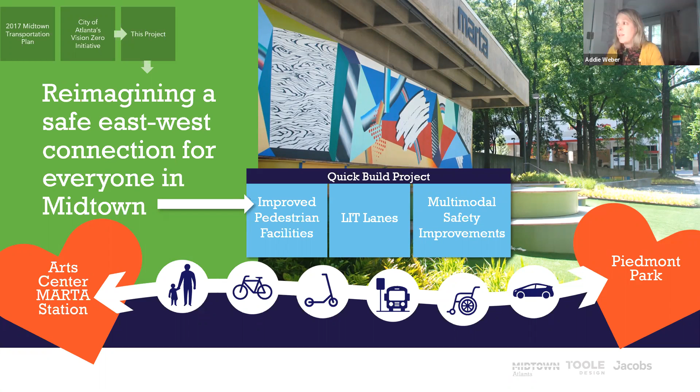So again, quickly going to go over the why and the where. All of this existing condition analysis can be found online. So if you want to do the deep dive, please go there. And we spent time in the previous virtual open house going over that. So as Julie mentioned, this is really focused along the corridor, but with an emphasis on the 15th and Peachtree Circle interchange. So we're looking at how do we provide that safe east-west connection in the north part of Midtown. That's not just for bike users, but also for pedestrian users as well. It plays an important connection in the district.

So most of you should know what lit lanes are, light individual transport lanes. We went over this in previous conversations, but it's really bikes and other modes that we really want to highlight. So it's the short trips, the last mile connections, human powered or electric vehicle uses as well. It's a great tool to use. Just think of it as expanded, upgraded bike facilities that we have through here.

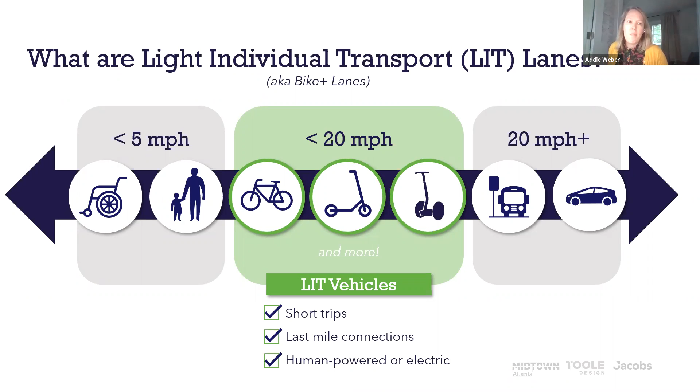So why are we doing this project? Well, there's several big initiatives that are happening citywide and with Midtown Alliance. So you might have heard recently the mayor has passed 25 miles per hour on local roads. This is in direct response to some of the feedback that we're getting and some of the data that we see within the City of Atlanta.

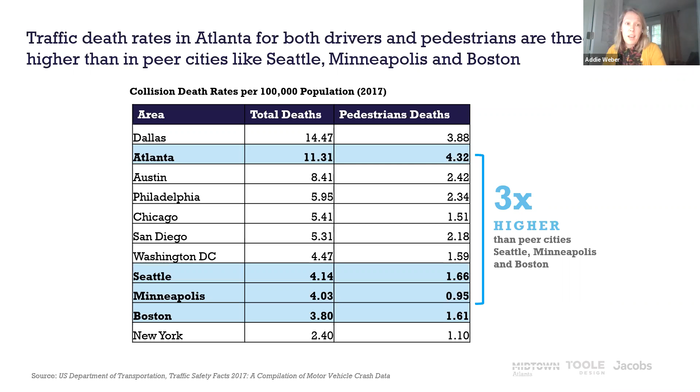Traffic death rates in Atlanta are high, especially when you look at comparable cities. That's why the One Atlanta Strategic Transportation Plan that was adopted really emphasized this Vision Zero approach, which looks at traffic safety as a growing health problem. So building on that Vision Zero initiative, the city is really undertaking a way to rebalance our streets and make them safe, not just for cars, but for bikes and peds as well.

So that's where this project comes into effort. This is from their previous transportation master plan, so it's not just pulled out of the sky. This was actually in the work program from the transportation master plan that was adopted. And as you can see, hopefully you can see my cursor, you have the magenta dashed lines, which are planned separated bike facilities. You have the blue line, which is on-street bike facilities to date. You have this planned shared use path. So we're really looking at how do we provide a safe connection from Piedmont Park all the way over to the Arts Center MARTA station.

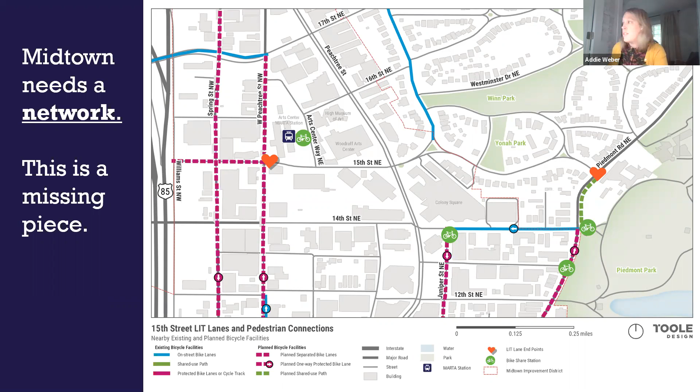Again, these are a lot of the projects that are happening. Midtown's got a lot going on. It's really great to see the thought and care taken at looking at how do we make these streets not just for cars, but for people. That doesn't mean eliminating cars, but it means looking at vehicles, bikes, peds, looking at people, where they're going, and where the potential conflict points are for the users as well.

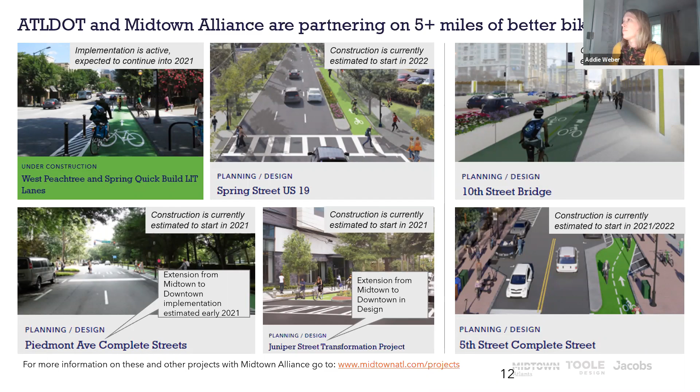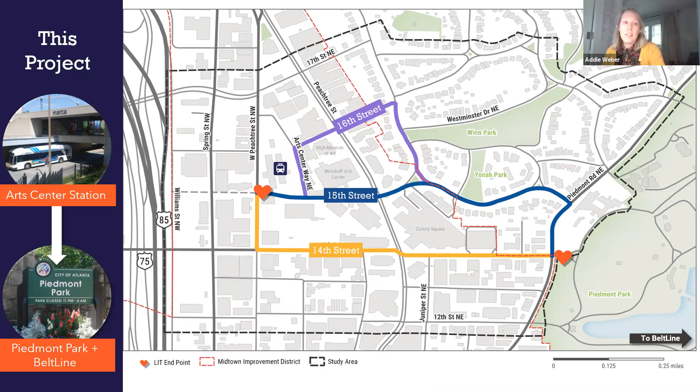So this project took a look at 3 corridors. 15th Street was the name of the project, but we wanted to make sure we took a look at 14th Street and 16th Street. From our analysis, 15th Street was really the preferred alternative for a variety of reasons. If you want a deep dive on the analysis that we did, you can go to the website. We did notice that 15th Street is that direct connection. We've heard from a lot of folks that they want that direct connection from Piedmont to the MARTA station and places in between. There's also obviously a wide right-of-way.

So part of our effort is really looking at how do we do this quickly within the right-of-way that we have. We don't want to buy new right-of-way; it delays the project. So where can we put bike infrastructure, and how do we improve safety? The Peachtree Circle and 15th Street intersection had a significant number of crashes at the northern end of the intersection, so right here. So how can we use this project to help improve safety for all users?

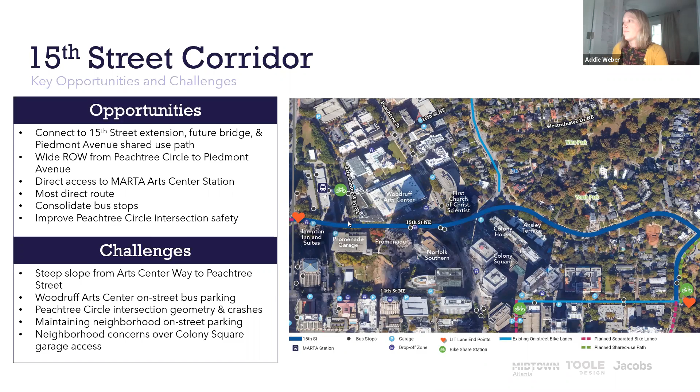So again, you can go find the existing conditions report. It's on the Midtown website. It looks at the community engagement summary. We did an origins and destination analysis of all 3 corridors that we looked at, transit operations, corridor overviews, a multimodal analysis, and recommended design considerations. We did spend a lot of time. I believe we did at least 2 rounds with some major stakeholders along the corridor, and then a deeper dive with some residents after our virtual workshop.

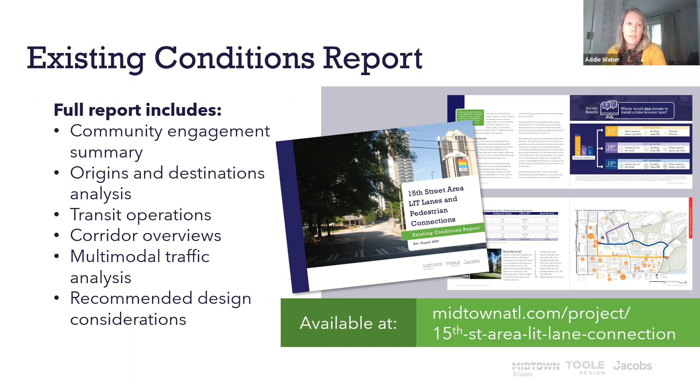So where are we in the process? Right now we're still in the community engagement process. We are in our 2nd virtual open house, but from here we will move into schematic design. From there, we will be able to let Midtown Alliance know how much funding is actually needed for this project and who the key partners are. So the implementation of this project is still to be determined, but that is something we're hoping to flesh out as we move into schematic design.

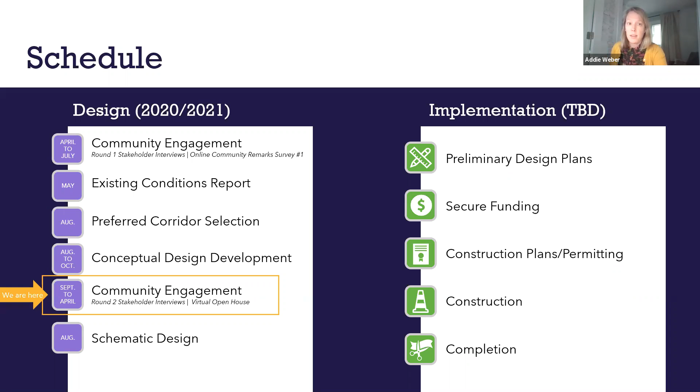So now I'm going to switch into the revised concept. Again, most of you have seen this before, so I'm going to move somewhat quickly through the facility types and the modes and really pause on the 15th Street Peachtree Circle intersection.

These are the 3 facility types that we'll be seeing along the corridor. So we have the protected bike lanes, which we know are the preferred type of facility for all users and all abilities. It really gives that safety, especially folks and families coming from Piedmont Park and going to the Woodruff Arts Center. Having those facilities are there.

Bike lanes buffered from parking. This is what is happening currently today on Peachtree Circle in Ansley Park, north of 15th Street. So Peachtree Circle already has a similar condition. And then shared lanes. While shared lanes aren't our preferred alternative, there are places where there is a pinch point, and recognizing the fact that we want to stay within the right of way, there are a couple areas where we highlight the shared lanes.

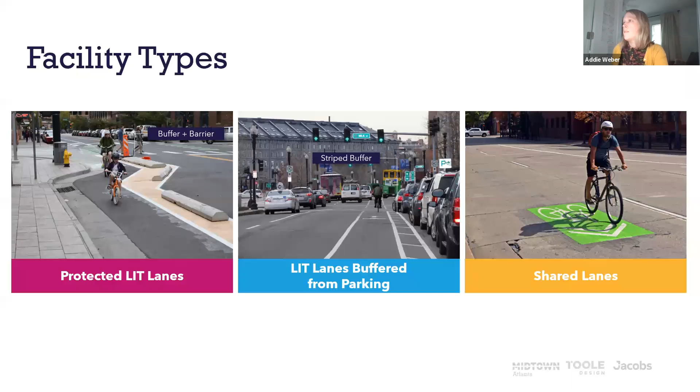So I'm going to start at West Peachtree and move from West Peachtree east towards Piedmont. Most of you know that there's going to be a 15th Street extension, and part of that extension is they will have bike lanes in either direction. Those will be sidewalk level facilities. So we wanted to build on that existing effort that is moving through the process and continue to provide bike facilities that are buffered from the vehicle travel lane.

So what you'll find as I move through this presentation, the orange dot is movements going eastbound, and the blue dot is movements going westbound. We will have conflict markings along the corridor to let folks know where there's potential conflict points with bikes and peds. So again, one dedicated eastbound lane for vehicles, one dedicated right turn lane, and one dedicated through lane westbound to line up with the 15th Street extension project.

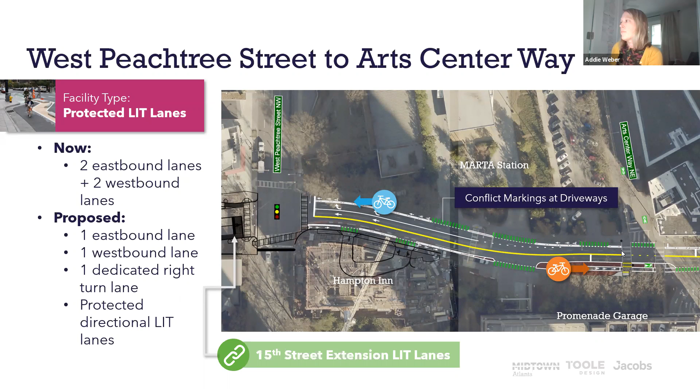Again, this is just a closer look at that 15th Street extension that will be coming online. You will have a dedicated left turn lane to go north on West Peachtree and one lane in each direction, along with sidewalk level bike lanes.

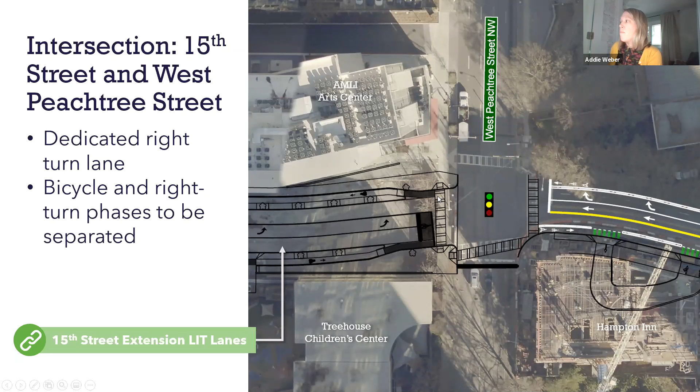As we move closer to Arts Center Way, we know, as we watched when we did our corridor walk, and those of us who hang around the MARTA station can see the number of pedestrians that move through the space. Part of our design concept is to really give places for people to be. So where should bikes be, where should pedestrians be, and where should cars be? Giving that legibility so that folks know where they're supposed to be, regardless of the mode.

We are suggesting an RRFB, so that's a rapid flashing beacon, at the intersection of Arts Center Way and 15th Street. So it retains the crosswalks. It adds a 2-stage bike staging for those folks that want to go to Arts Center Way. We did look at Arts Center and 16th as an alternative. Some of the feedback we got from the community and stakeholders was there's a lot happening on that intersection and closing it down. However, we know that that is still a route, and so we wanted to make sure that route was still a viable alternative.

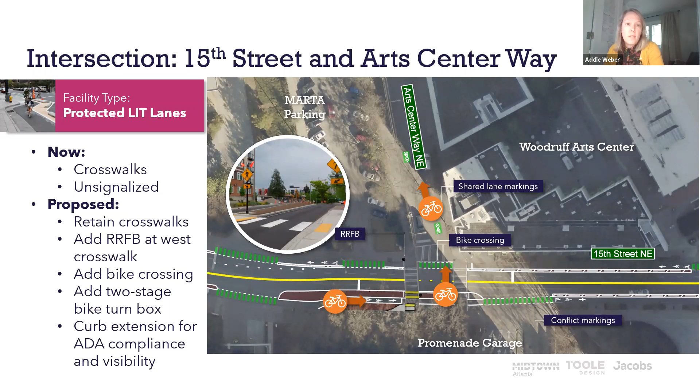Moving from Arts Center Way east towards Peachtree Street, again, we're continuing with the buffered bike lane protection, both eastbound and westbound. Through here, we wanted to preserve and consolidate some of the loading bay and drop-off zones that are there today on the south side of 15th Street. We also have worked with MARTA and had discussions with them on their needs for drop-off at the MARTA station and the MARTA bus stop.

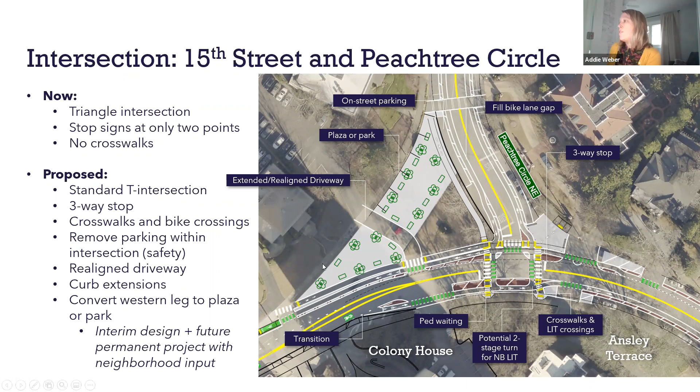So we went back to the drawing boards and looked at how could we do a lighter touch and keep a lot of what is there today. So this is the lighter touch that we have developed. This, a couple things, it retains all existing stop signs. So currently you have 3 stop signs today, and that is our recommendation moving forward.

What was interesting feedback was, as we were talking to some of the stakeholders, some of them didn't realize that there were 3 stop signs around the triangle. And I think that just goes to the wideness of the road, and that folks are looking in every different direction to move through the space.

So some of the key elements that we put in place here was to have Peachtree Circle tie directly into 15th Street. We understand that this is the major movement based on our traffic analysis. These legs of 15th Street, so 15th Street is here as it comes to existing 15th Street, teeing that up a little bit. That way that intersection has direct view of where folks are coming from, and also providing, again, that legibility of where users should be in the corridor.

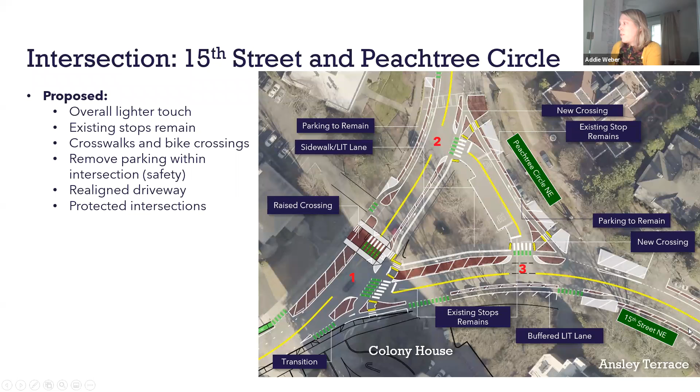So what does this look like? So the intersection, the raised crossing, this is an example of that. You can also see locally down by Krog Street Market, there is a bike ped crossing that the Beltline has to date. So that is a great way to not only provide visibility for bikes and peds as they're crossing the road, but it's also a traffic calming measure as well.

And again, the lighter touch around the triangle where you're going to have bikes and peds moving through the space would be something along these lines, where you have some sort of protection here and a more robust protection at intersections to make sure that bikes and peds are protected from vehicle turns as we move through here. Parking would still be retained along Peachtree Circle and along Peachtree Circle here, but it would need to be removed where there were some spaces along here. Again, the parking along the island, we heard from residents that that was not a priority, but putting places for people to walk and cross was beneficial.

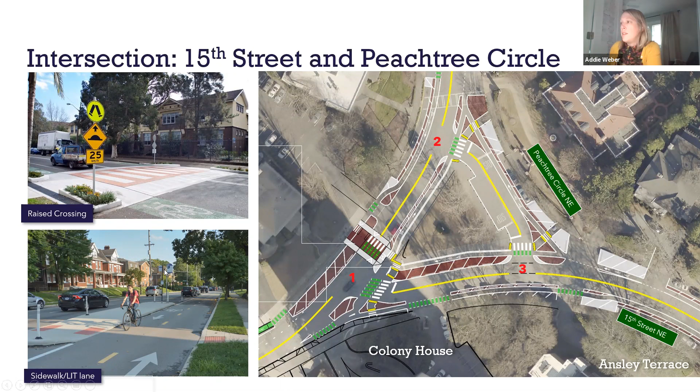So I'm going to leave Peachtree Circle and continue eastbound along the corridor. And not much is changing from what is currently on Peachtree Circle north of 15th Street. So it's just formalizing that connection. So lit lanes with a buffer and parking to remain along the corridor. We are looking at also tightening up the vehicle travel lanes to help slow speed through the community. And you can see how bikes move through here.

Once we get to Lafayette Street, again, we heard from folks about the lighter touch through there. So it's really just formalizing the connections of where bikes and peds should be. Again, they're kind of using the street along with vehicles today because there's no formalized crossings that are well established in the breadth of the Ansley Park Road. So really identifying where bikes and peds should be as they move through this space.

And as you approach, we have the Piedmont Shared Use Path, which will be coming up along the east side of the road and then crossing. So we are going to provide a two-stage crossing further when you get to Piedmont to cross over and access that shared use path. We are retaining the parking for the community over here, and then there were 2 parking spaces that we dedicated towards having the protected facility for those folks wanting to access Piedmont Park.

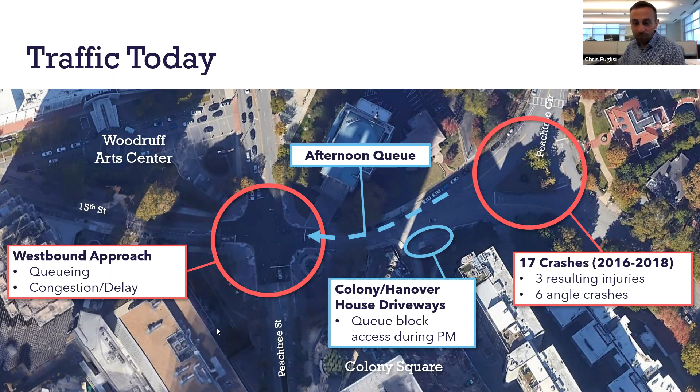And then we also noticed a concentration of crashes at the Peachtree Circle intersection. There were 17 crashes in the 3-year period that we looked at, which is fairly high for this level of traffic volume and sort of residential character street. 3 of those crashes resulted in injuries, which is concerning, and 6 of them were angle crashes. Angle crashes are when turning vehicles collide with other vehicles. So we took that into consideration when helping craft the concept. If you could advance the next slide.

So by maintaining the cross section at Peachtree Street, we kept the same lane configuration. We kept the left turn bays. And then one thing that we are adding is a westbound left turn arrow at Peachtree Street to help with that queuing on the westbound approach. So that left turn phase through our analysis actually reduced queuing by about 1/3, which is pretty significant. So that should help navigating this area when entering and exiting the Colony House driveway, but also just helping reduce congestion in Ansley Park.

We also modified the geometry of the Peachtree Circle intersection by really teeing up those intersections at 90-degree angles. Helps make for a safer area to cross. Also with the narrower lanes and speed calming elements, we anticipate that this design should experience fewer crashes and be much easier to navigate around this area.

It also provides an opportunity to have protected pedestrian and bicycle crossings. We also didn't introduce any new stop signs to this area, so traffic should flow through this area as it does today, just a lot safer.

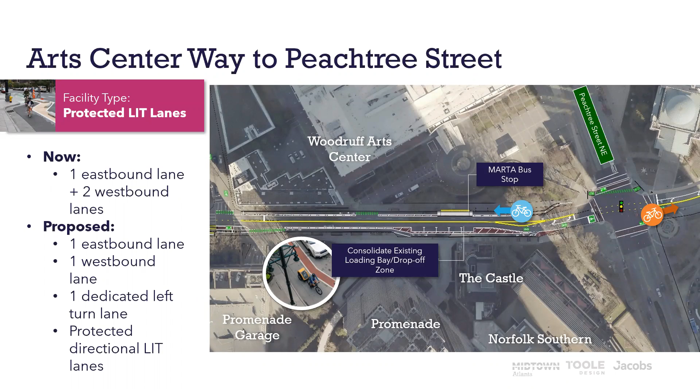I think there was a question about what happens if a MARTA bus is loading and unloading at that location, and how the bikes respond. The bikes, they would stop. The LIT lane users will be obligated to stop, and we'll have signage and pavement markings to indicate that they yield to pedestrians and anybody getting on or off the bus. So that would be a yield point for bikes and scooters. And we really want to reinforce that, given it'd be a constrained bus stop by definition. Thanks, Tom.

Okay, so wondering if there will be a left turn phase at Peachtree heading west. We did recommend a signal upgrade to include a westbound left turn phase exiting Ansley Park from 15th Street onto Peachtree Street. That's a heavy demand for vehicles. So by giving them dedicated time, it will help with the queuing, but it will also be safer for pedestrians and cyclists crossing on that southern leg, because the left turners will have their own dedicated time to do so.

Yeah, I think that dedicated start is really going to be helpful in that pinch point. Again, what we are kind of trying to weigh is the need to create a safe facility and also the need to implement these facilities in an efficient manner. And so in this pinch point, the design is kind of trying to avoid having to acquire more right of way. So this was the preferred facility.

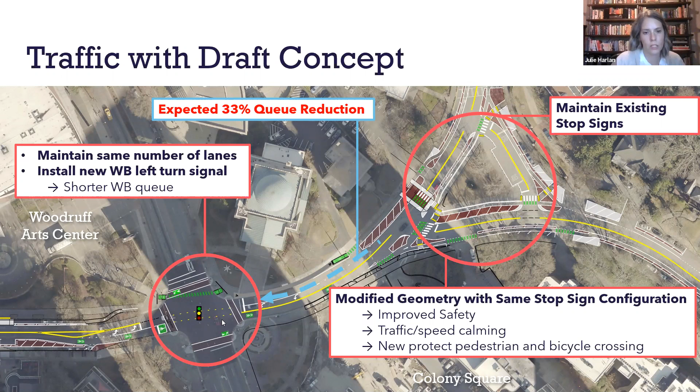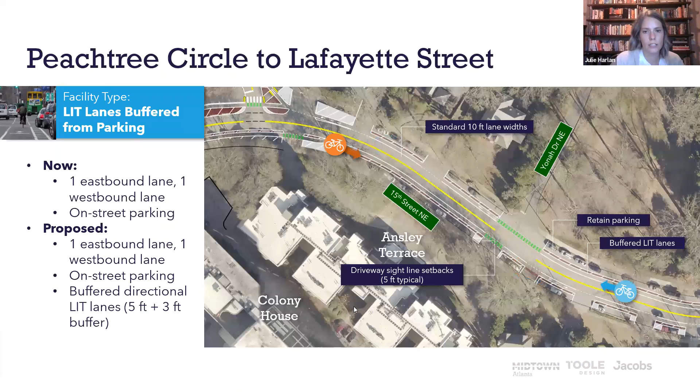So Addie, maybe we can go back to 15th and Peachtree and just kind of go over how we thought through folks moving through this intersection in terms of getting up the hill and having to yield to the buses, as well as moving into the shared situation on the sidewalk of Peachtree and 15th Street, instead of going into the car traffic. Yeah, the answer is yes. And I'm going to have Tom kind of piggyback on here.

We looked at several ideas of how to navigate through the Peachtree Street intersection, knowing it's complicated and there's a lot of vehicle volume, east-west, north-south moving through here. And how do you begin to do this? We originally started with, can we do dedicated bike signals or a bike phase? But one of the impacts of that was a lot of vehicular delay through that intersection.

So moving eastbound or westbound, coming up is to stage with the pedestrians. So it would be a leading pedestrian interval. So pedestrians and bikes would get to go ahead before vehicular movement crosses. So they would come over, they would cross here, have a mixing zone, and then enter the facility here. We did explore the bikes coming into the vehicle travel lane, and then entering into the dedicated lane facility. But to some earlier points about the incline and getting that speed going through there, we felt like this was a better option.